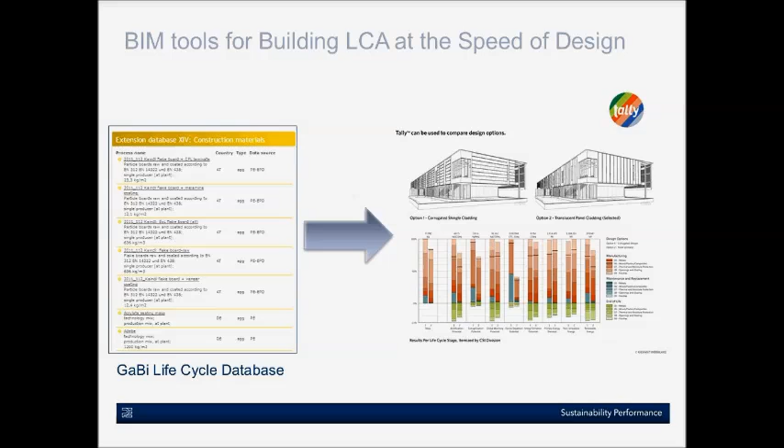As you're designing it and make changes in the Revit model, this is suddenly making use of EPD data much easier. It's not a question of looking at loads of numbers and trying to understand it - you can actually put that data into your building model and really understand how different products impact at the building level. And so that's really driving change in terms of how people are using the data.

The other type of environmental information - this is not just in construction, but across all products - the European Commission are driving the product environmental footprint, effectively as a way to give consumers environmental information that isn't misleading about products, to enable them to select products with lower environmental impact across the life cycle.

And they're currently piloting those projects across a number of different sectors, including construction. The aim of that is that these pilot products will look at how this type of assessment can be implemented, and what sorts of data can be communicated in that.

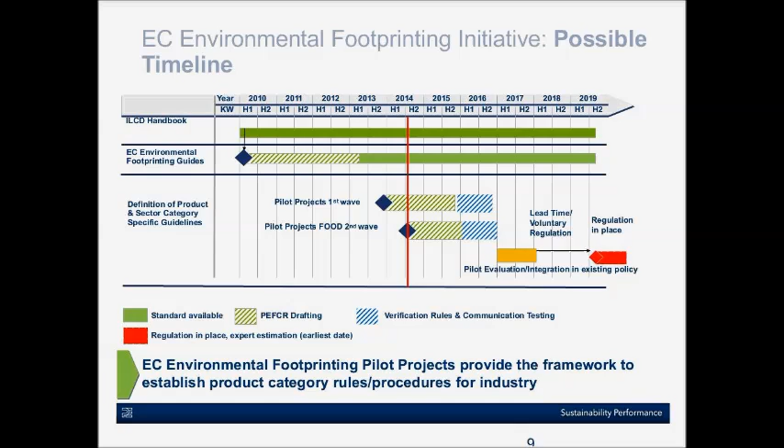And effectively, the Commission has said that if voluntary use of these footprints doesn't work, then regulation will come - they will be looking at people having to do this if it doesn't really work voluntarily. So this is definitely moving forward.

For construction, there's always an interesting question of how PEF and the EPD standards that the industry spent a long time developing for construction products interact. I think there was concern initially that it would be a bit of a fight, but this slide comes from the European Commission.

He's saying it isn't actually going to be a fight. They actually want them to work together. They really recognise that the construction industry has spent a long time developing EPDs and a consistent methodology that can be used across all the products, and that really works in terms of allowing the way that products, you put cement and aggregates into concrete products that you then use with other types of products like timber, plasterboard, for example, to make a building. So the data has to be consistent and comparable. So I think hopefully we will end up in a situation where we have the best of both worlds going forward, and we should have a better system at the end of it, which would be good.

Just to summarise in terms of communicating, we've talked about providing this information so that consumers can use it to understand how products, what impact they have, and how they can look at different products. But as an organisation, if you do this, you do get information in order to help you target impact reductions. You can actually make a better product as a result of doing an environmental product declaration.

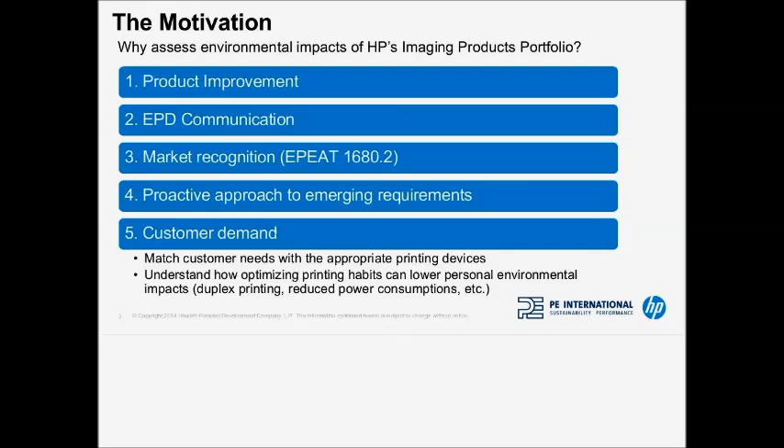And finally, their EPD program allows them to meet the customer where they are. Users and customers are interested in understanding the environmental performance of printing because the use of paper is so evident to the user. The customer feels that they're using trees or killing trees, and there's a real interest and concern out there about the environmental implications of printing. LCAs and EPDs allow HP to provide the environmental information that customers are looking for.

This product sustainability program faces certain challenges with a portfolio of over 10,000 imaging products ranging from consumer-level inkjet printers, desktop printers, to high-speed office laser jets with scanners and faxes integrated, and an ever-evolving portfolio due to customer and regulatory demands, with customers in over 100 countries and a global supply chain for their components. Time and expense were also a challenge to be overcome.

HP needed a short turnaround time in order to get EPD certification in time for market release. There was a short amount of time between when the model was finalized and when the EPD certification needed to be verified. An LCA from scratch for each product was not feasible, and it also wasn't necessary.

Because we were doing so many LCAs, it was clear from the beginning that there was an opportunity to leverage, but it was a real puzzle to figure out how exactly we could do that when we needed a model that would be flexible enough to cover a wide variety of imaging products, from desktop inkjets to desktop laser jets to scanners. The solution was a modular approach.

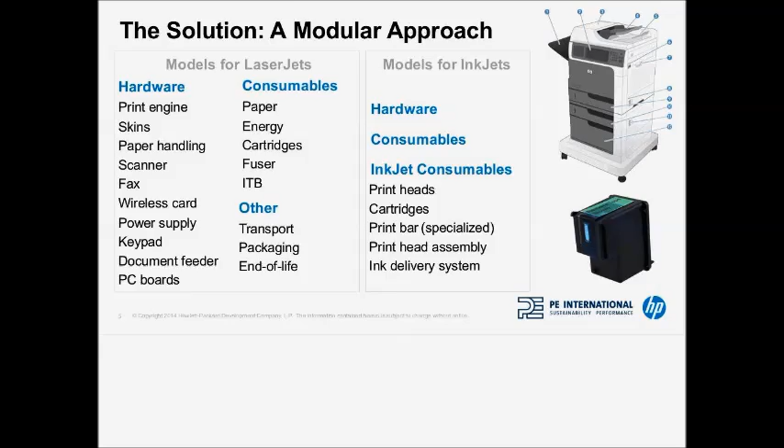The system is based on GaBi Envision, a web-based interface which lives in the cloud. The key feature of having a web-based tool like this is that it allows fast feedback for design for environment. It allows the user to view and modify materials and use phase scenarios so that they can get insights quickly to inform design. It's a key difference from a typical LCA, which will be done at the end of the design of a product.

The model has been set up to meet HP's immediate and also longer-term needs. It covers all printer components, consumables, and inputs. It includes all of the LCA phases, and it's flexible to allow modules to be added for future products. Finally, it meets the immediate need of generating an ISO and PCR compliant EPD for EPD registration.

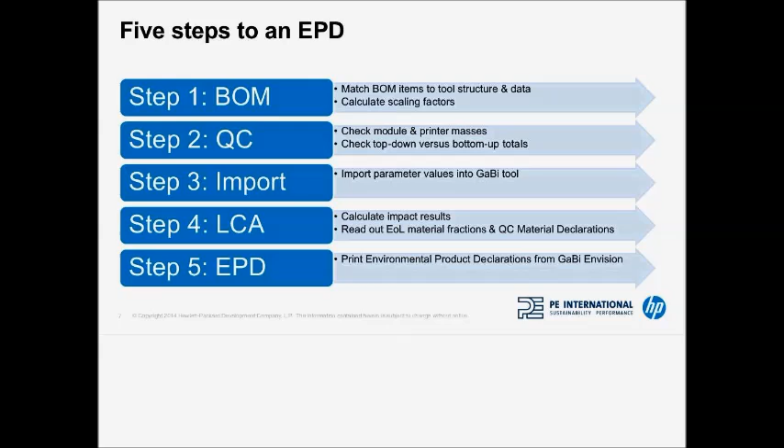Reusing a parameterized LCA tool allows us to minimize the workload into 5 steps. The first is collecting data from bills of materials and product measurements, then QC and reviewing of mass totals from top-down versus bottom-up measurements, importing the parameter values into the GaBi Envision tool, which is done by cut and paste or by uploading from Excel, calculation of impact results, and finally, printing the environmental product declaration from the GaBi tool.

The boundaries, what is included and excluded from the life cycle study, are dictated by the product category rules, but there's also enough versatility in the model to allow design for environment applications or to model use in global markets, to reflect the EU or Asia Pacific in particular, for example.

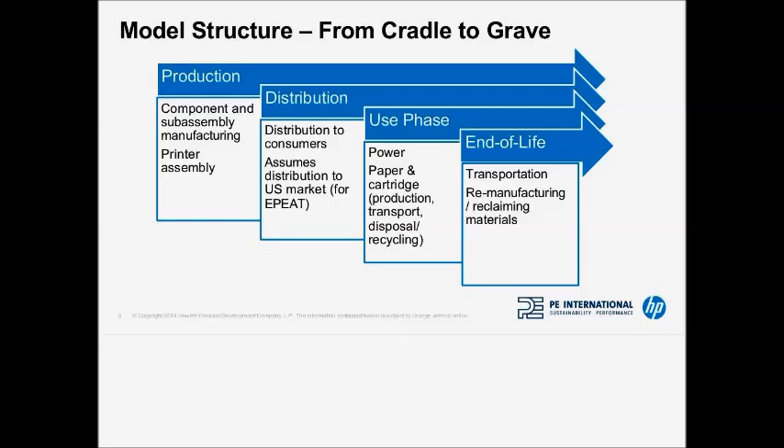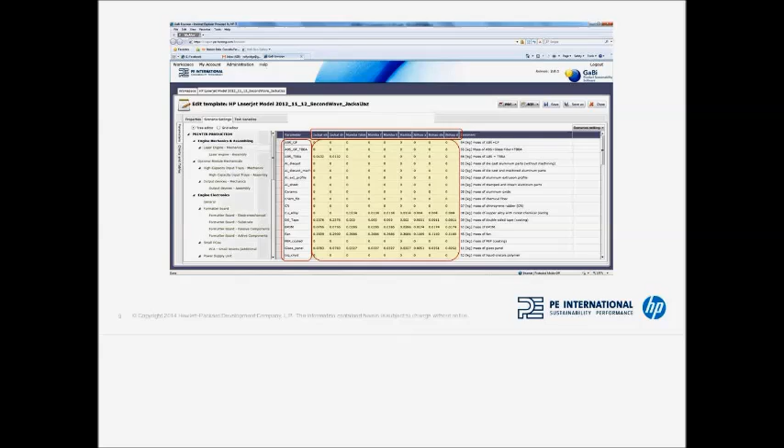The key benefit here is that you can use one model to analyze all of these different types of printers, meaning that the results are consistent and comparable among one another, which allows you to get insight into trends among your many product models and among the many printer models that we were analyzing.

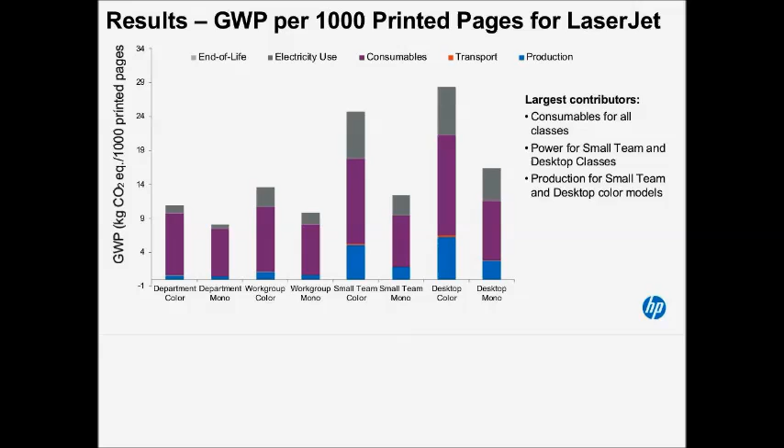Followed by power consumption, and power consumption for small team and desktop products is a key hotspot. Printer production is a large contributor for small team and desktop color models for that application group.

So far, HP has produced EPDs for about 80 LaserJet products spanning the entire portfolio, 15 inkjet products spanning a wide variety of their portfolio, and 5 scanner products, which are also very diverse. Key findings include the conclusions that consumables remain the largest source of environmental impact for printing, that power consumption and production of the printer are still significant impacts for lighter application LaserJet products, and that the inkjet portfolio has lower impact than the LaserJet overall when looking from the perspective of HP's entire business.

These findings have helped HP to focus their sustainability program and to reduce impacts across the life cycle most effectively. They've been working with their customers to help them print more efficiently, and they have focused efforts on making design changes to reduce cartridge impacts, which is a contributor to the consumables life cycle phase.

The strengths that HP has seen in this software-enabled approach are flexibility. HP can conduct LCA or generate EPD for a wide variety of imaging products, consistent data and model assumptions for all reports, reproducibility and audit trail, and one review process for all reports, which is really key in reducing the timeline for your EPDs and LCAs. Transparency and harmony with the ISO standards for LCA and EPDs, the ISO 14040 and 14025 standards.

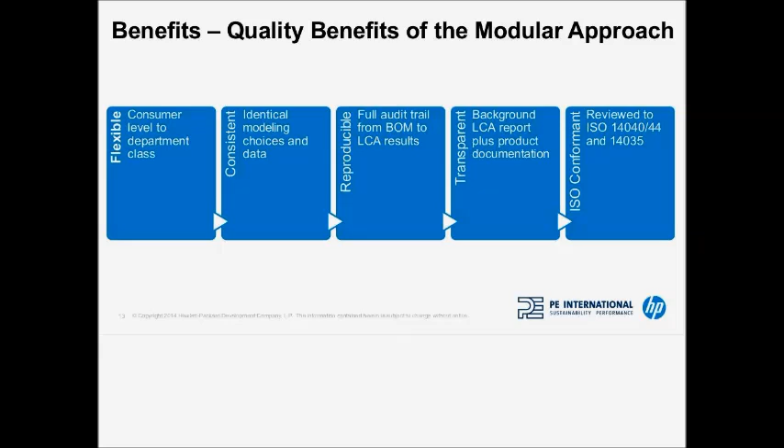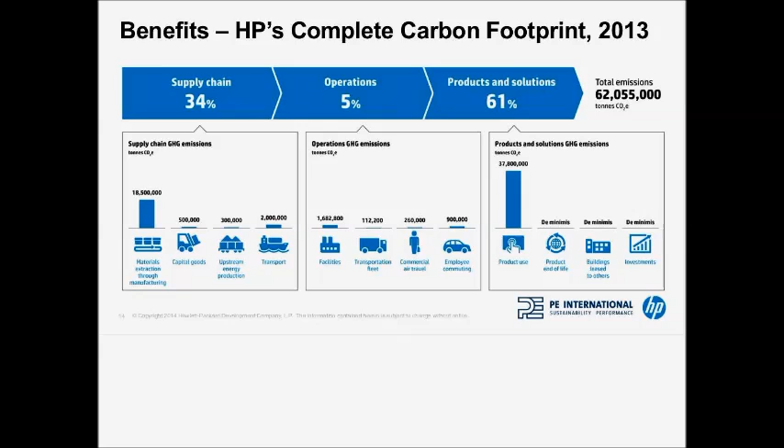HP was the first large ICT company to publish their complete carbon footprint, and the first to consider Scope 3. And as you can see, the ability to model your Scope 3 emissions is key to understanding the big picture, and for a company like HP with products which are complex to produce and also consume energy on the consumer side, the impacts of what HP does are largely outside of their walls, and that's very important for them to understand.

HP has also conducted a full water footprint, including Scope 3.

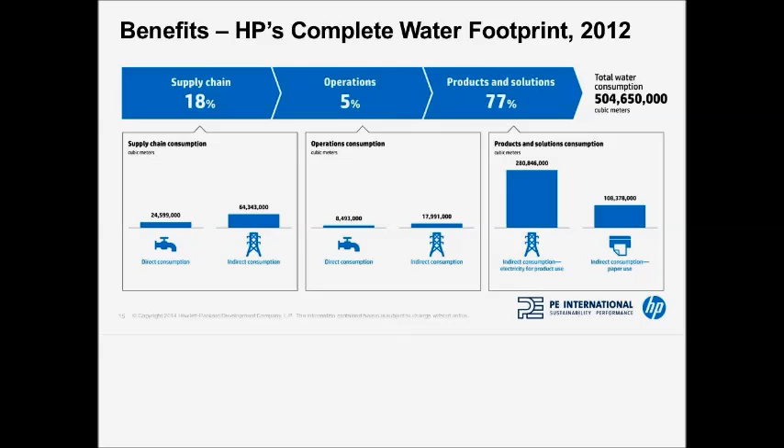And the key benefits overall for this program have been that it has enabled HP to become the first IT company to fully understand its carbon footprint, including Scope 3, and to get that full picture view. HP has also been able to maintain a truly cutting-edge design for environment program, and it allows them to improve products early in the design process, which is a rarity. Having a fast EPD program that can inform design rather than just report results is a rarity.

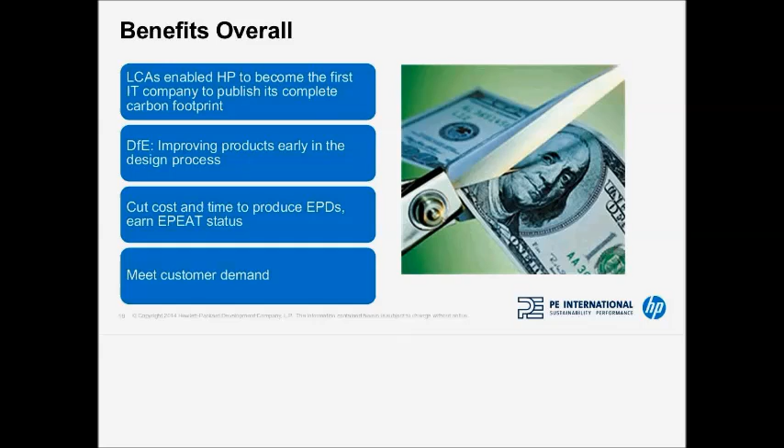And this software-enabled approach has allowed them to also cut the time and cost to produce EPDs and to earn EPEAT status. And finally, most importantly, from a business perspective, HP is meeting customer demand for environmental information, and their EPD program ensures access to the entire market. Using EPEAT registration and achieving EPEAT Gold and Silver status allows them to gain and keep large institutional buyers, which require EPEAT.

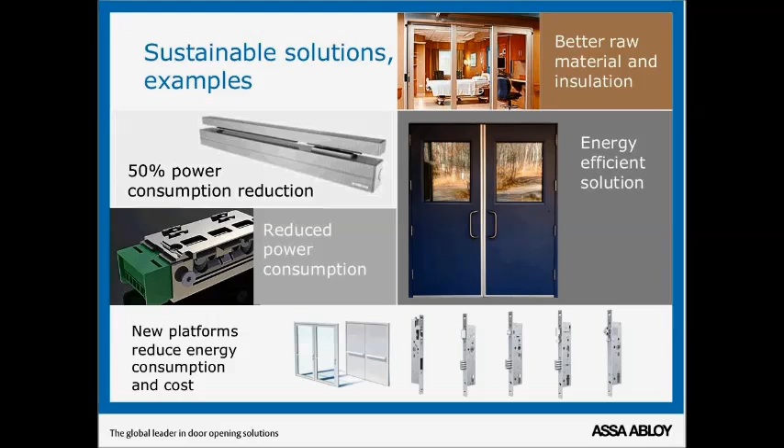Also, when we look towards our electromechanical and access control solutions, we have energy management in our ASSA ABLOY hospitality division, energy efficiency revolving doors in our entrance systems, and we won the award for the best green solutions at ISC West for the power over Ethernet access control solution.

So we've identified that we have some sustainable solutions, and identified a need for EPDs so that we can access these green building markets. But ASSA ABLOY, as we've seen on the first slide, is quite a large group, so we need a bit of a program for how we're going to integrate EPDs into ASSA ABLOY. We need to develop a corporate strategy to generate EPDs.

So we decided that we'd need a pilot to start out, then our second phase or second wave of EPD generation, where we would select an increased number of products to develop EPDs for. But ultimately where we want to get to is an automated EPD generator - we would like to have EPDs for all of our products and for our customers to be able to generate these EPDs seamlessly.

So I think quite similar to what HP have in place now, they can rapidly develop life cycle analyses and then EPDs from that. But we need a series of steps and a plan in order to get there. It doesn't just happen overnight.

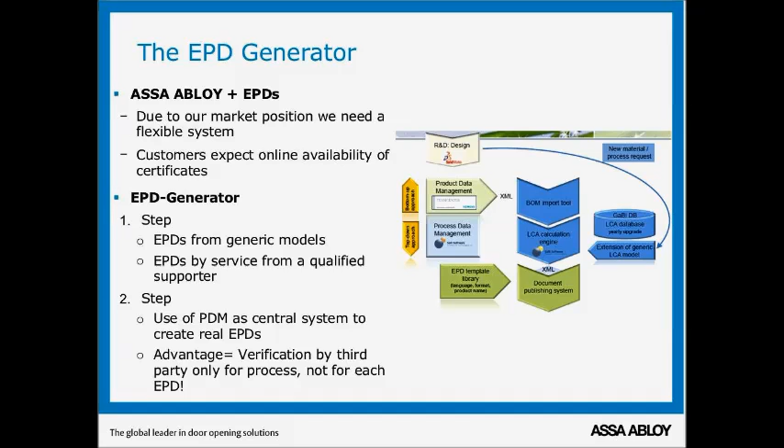So naturally enough, we couldn't skip directly to a PDM-based EPD generator as much as we would have liked. So we started out this time last year with our pilot phase. We selected 5 product groups from around the world and developed those EPDs at the end of last year.

We're now into our phase 2, where we have identified either from market requirements or some of our flagship products, and around the group as a whole we'll generate between 60 and 80 EPDs by the end of 2015. Next year we will do a similar process, and we're continually working towards developing our EPD generator.

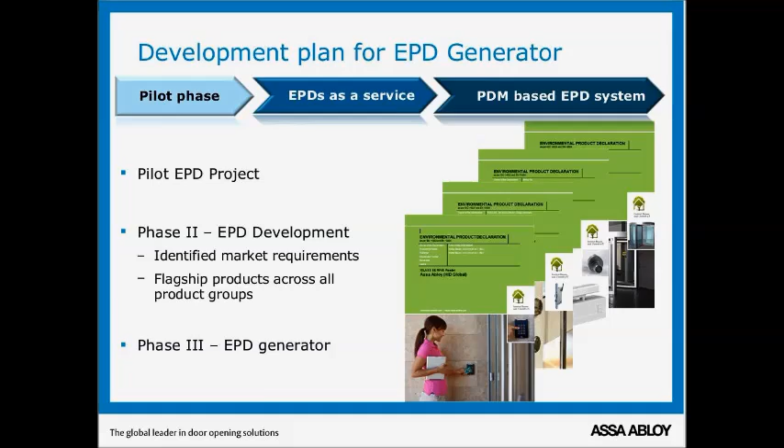So I briefly mentioned this, including R&D. How does sustainable product innovation play a role? Well, this is where you incorporate life cycle analysis as part of the entire process, so the LCA becomes an integral part of the entire innovation process.

For example, if we have a mechanical lock, the highest impact is the extraction of raw material and the manufacturing. It will consume minimal energy during its in-use phase and be almost fully recyclable at end of life. Whereas if we're developing an efficient door or access control system, manufacturing will be a large part of the impact, but the largest part of the environmental impact for those products will actually be the energy in use, or for the door, the energy it can save.

So our focus is to really ensure products are developed to be as energy efficient as possible and as recyclable, if not fully recyclable, at end of life. This has two benefits: it helps us meet our customers' customer demand and provide value, but also internally helps reduce our costs, aiming to manufacture as efficiently as possible and reduce unnecessary material.